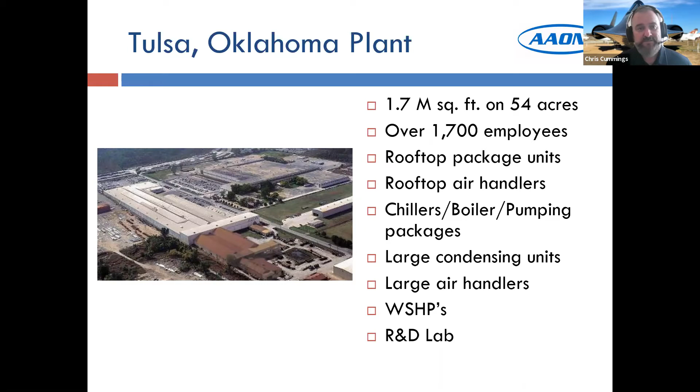We're doing rooftop air handlers, chillers, boilers, and pump packages, large condensing units, our big air handlers, and also some of the smaller tonnage water source heat pumps. And we have our new R&D lab back there as well.

In addition, we have manufacturing capabilities in Longview, Texas, where currently we have a little over 500,000 square foot on 25 acres and over 500 plus employees. We're making our loose coils that we ship up to Tulsa for installation in our rooftop package units, and some of the condensing units, smaller air handlers like our H3s, V3s, which I don't want to call fan coils - they're more like mini custom air handlers - and some of our more residential type products we're building down there.

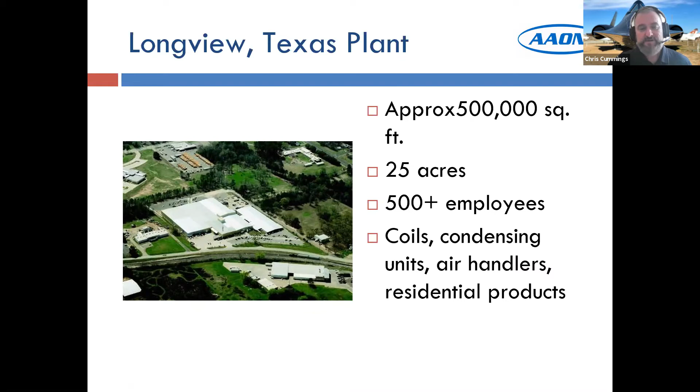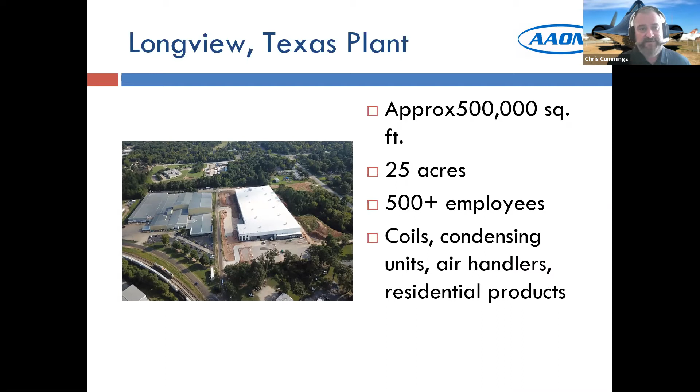This first picture shows the plant as it was before our expansion, and we've recently added a second building which basically doubled our capacity down there. So we've been investing and expanding our manufacturing capabilities.

Our third location is in Parkview, Missouri. This was probably known before as Wattmaster Control, but AAON purchased Wattmaster Control, brought them into the AAON mix, and it's now AAON Controls. We have over 150 employees there, and all of our new products for custom control applications and new product development for controls is being done out of our Parkview, Missouri plant.

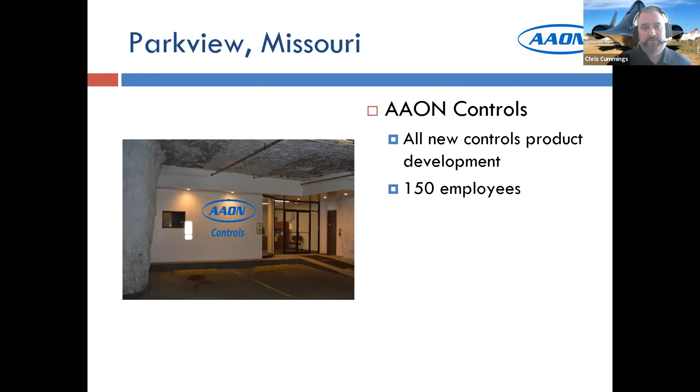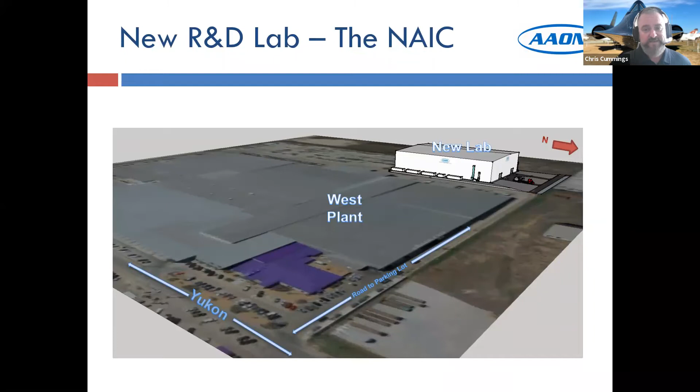So we'll talk a little bit about our new R&D lab, which we call the NAIC, the Norm Asbjornson Innovation Center. This shows our west plant up in Tulsa, Oklahoma, which as we mentioned was about 1.7 million square foot. To give you an idea of how big this lab is - it's huge - it's located out behind our west plant, and it's about 63 feet high, 330 feet long, 230 feet wide.

But we have multiple floors in there, and you can see the truck here with a unit on the back of it can back into the opening at the end of our building. We have cranes in there that will lift that unit off and then can set those into place for testing.

Overall, we have about 162,000 square foot of laboratory, and we've invested - I think they started off around 30 million - but we're now about $50 million into this test lab. What they're doing here, we're doing multiple things: one, we can do factory witness tests, but in addition we are also doing all of our future R&D, like the units that we're testing and trying new things with. We will put into this lab to guarantee performance values that we do publish in our catalogs.

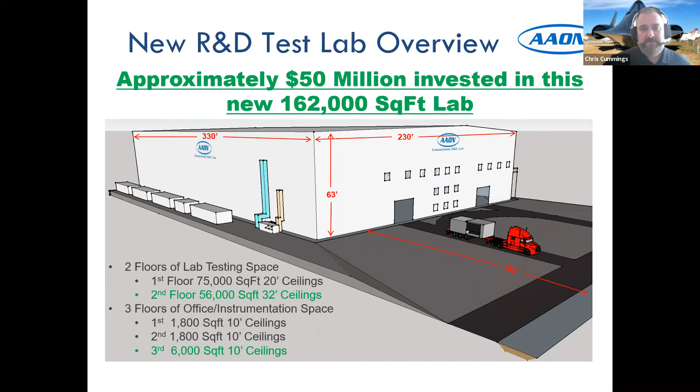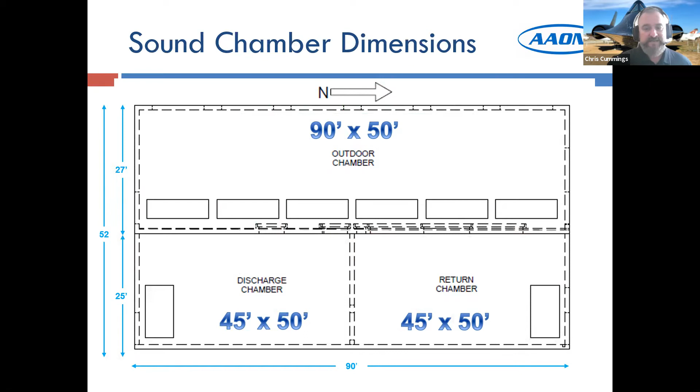One of the really cool things we have is a sound chamber, and it's the largest of its kind in the world. We can take our largest unit and put it inside, up on the top floor, to simulate all the outdoor conditions. So we have 3 chambers here.

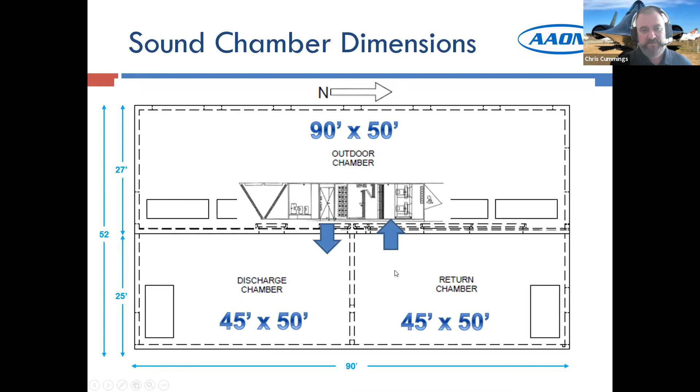We have on top the outdoor chamber, where we can simulate ambient temperature conditions. Then below we have a discharge chamber where the supply air would come in, and this is our return chamber. It comes out of this opening in the back wall and back up into the building. So we have 3 totally separate chambers where we can measure the sound and performance of those units.

We can do up to 540 tons of chillers, and we have capability of going up to around 300 tons of air handlers. We can do about 100,000 CFM of supply air through the air handler, but external to the unit we can pump about 400 to 410,000 CFM through that outdoor air chamber to ensure we get the conditions we want. This whole sound chamber is constructed of 12-inch concrete walls, ceilings, and floors.

It is all independently isolated from the rest of the lab to ensure the tightest measurements for sound and vibration. So it's all independently isolated from the rest of the lab.

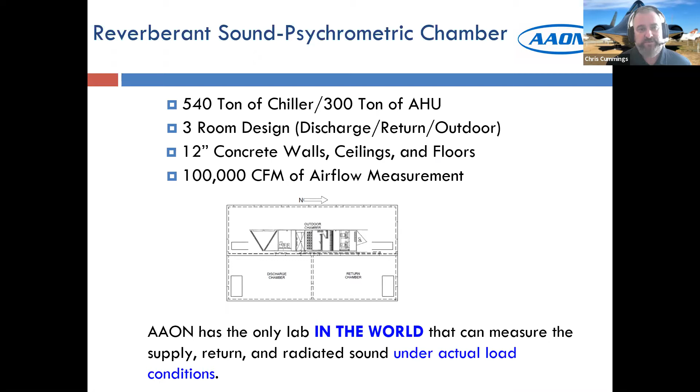We are basically the only manufacturer in the world that can measure the supply side, the return side sound levels, and the radiated sound levels all under actual load conditions. That's important, because if you have a project where you need to maintain sound levels at the property boundaries, we can guarantee those sound levels at actual load conditions. That's very important for a lot of applications.

Just to show some numbers on the different chambers we have: the one we were just talking about is our sound and psychrometric chamber. In addition to measuring performance, we can do the sound and unit performance all under actual load conditions.

The really cool thing with the sound is that we have a broadband and discrete frequency measurement range, from essentially 50 hertz all the way up to 10,000 hertz, and we can break that down into 1/3 octaves. So if we're running something, we can precisely determine if there's an issue at a certain level, breaking each octave band down into 1/3 octaves. We have very good control and measuring capabilities inside that space.

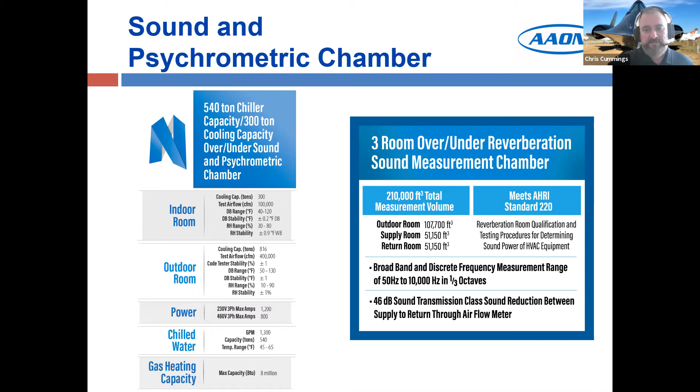In addition to that chamber, we have 4 other psychrometric chambers. They don't have the sound capabilities of the sound and psychrometric chamber, but they can measure performance. So if we just wanted to do a performance test on one of our units, we could put it into one of these different chambers, all different sizes, ranging from 20 up to 100 tons.

Depending on the size of the unit, if we had a 5-ton heat pump we wanted to check out, we'd put that into a 20-ton chamber. These chambers are pretty much being used all the time. Right now we keep them full with R&D, doing new development of new products, and in addition we work on customer required performance or performance witness tests as well.

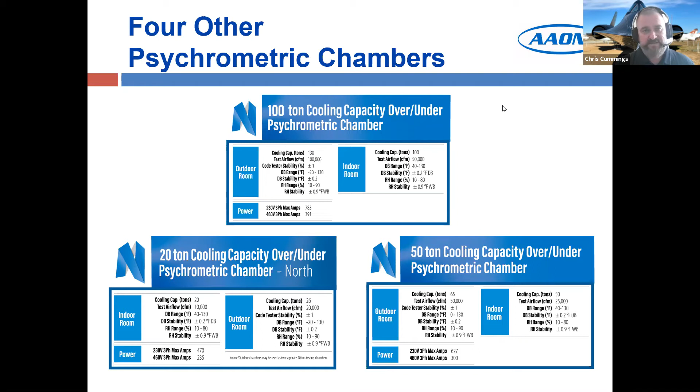So just know that in addition to that large psychrometric and sound chamber, we do have other chambers there as well.

We also have what we call an environmental test chamber. This one's pretty neat too, because we can simulate different environmental conditions. We can do up to 8 inches of rain per hour, with snow up to 2 inches per hour. We can put wind blowing through there up to 50 miles per hour, and we can go with an outside temperature from 0 up to 140 degrees.

It has to be 35 feet high, because for simulating rain or snow, especially the rain, we wanted to make sure the droplets, as they form, are taken over by gravity. To do that, you have to have them produced higher up, 35 feet off the ground, to make sure it's not being directly sprayed, but more closely simulates rain.

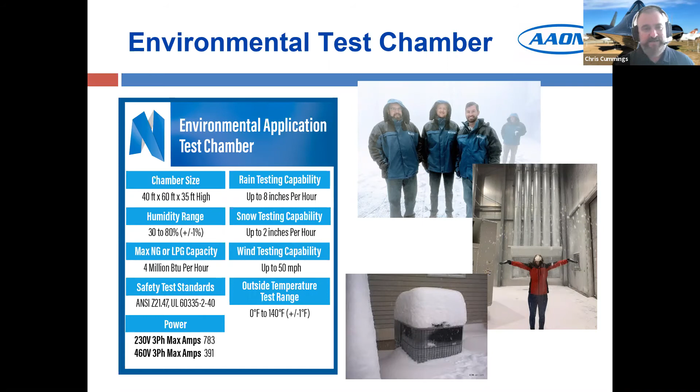We had this running for one of our sales events, I think it was in August, where it was like 98 degrees and very humid outside, and we were producing snow and having snowball fights inside this test chamber. So it's pretty cool.

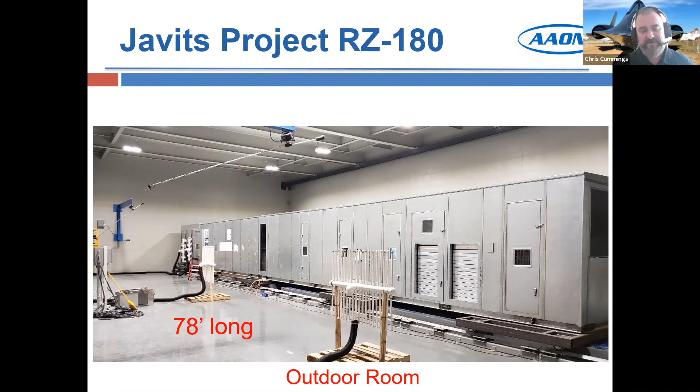So this is one of the units in the actual sound and psychrometric chamber. This is a 180 ton RTU unit, and this one here was actually 78 foot long inside that unit. So what we're seeing here is the outdoor simulated chamber. You can see the concrete walls, and over here we have a jib with a microphone that rotates around circularly, and the same thing over here. So these rotate around as we're running the test to get a very good spectrum of the sound, and it gets us very accurate, detailed data.

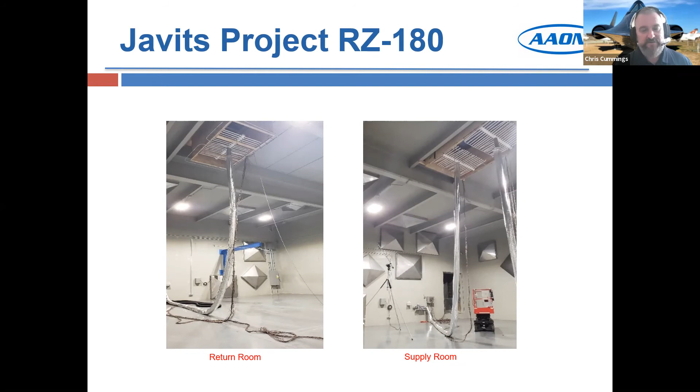Next slide. This would be down below in the return room and the supply room. It's kind of interesting, but you'll see these metal triangular shaped pieces on the wall here. This was all done by an acoustician who came in and determined where those had to be placed inside of this room to ensure we would get the reverberation inside that room needed to get accurate, detailed information.

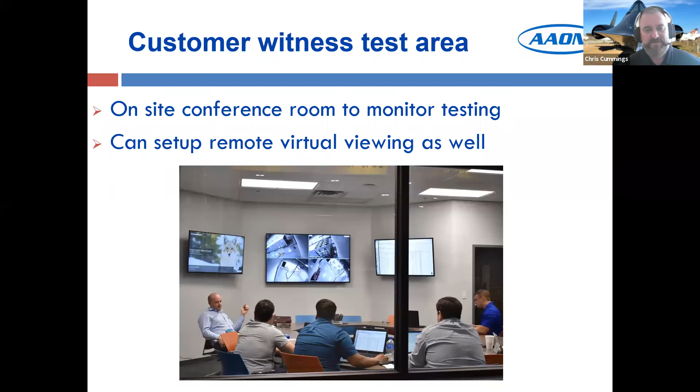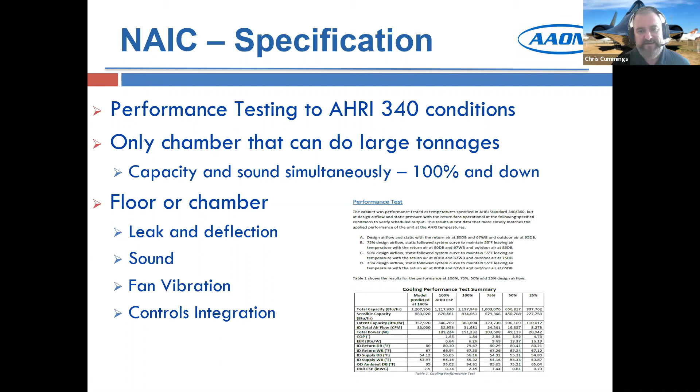Okay, next slide. This is just some typical verbiage, which we can also provide for you should you want to include that into your specification, talking about some of the different types of tests that we have available to us and for you.